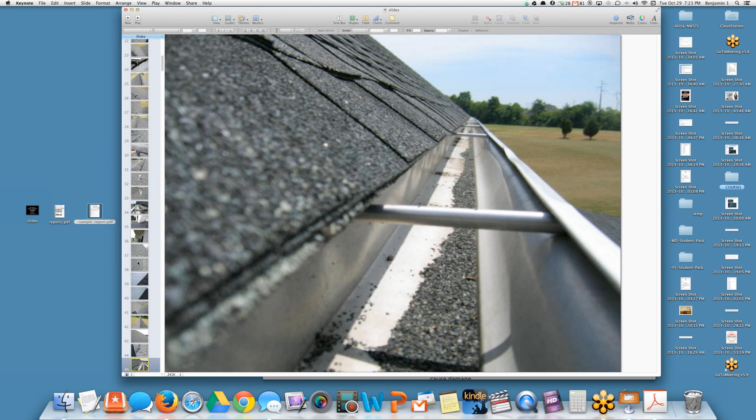Here's a shot of the gutter. Skylights—I'm required to inspect skylights, but I also inspect all the flashing: the header, which I call the apron or footer, and the step flashing. And I look for any kind of damage. The vents, the chimneys, all the planes of the roof, not just the one I can see from the front yard. There's the porch roof.

So I'm going to go a little fast here. I'm inspecting everything—there's a tennis ball in the gutter right there, so that needs to be cleaned up, and that's an improvement recommendation. A homeowner can clean tennis balls. There's the stucco, and now I'm down on the ground. The stucco exterior of the chimney is cracked and damaged, so that needs to be repaired. There's a good shot there.

I'm a true believer that a picture is worth a thousand words. And when you have almost a thousand pictures, that's a lot of words. So let's go through the pictures. I'm inspecting everything, every component, almost every area, and taking pictures like crazy—I'm just shooting like nuts.

Take pictures, take pictures. Don't be afraid that you're going to take a picture of a defect and not see it or not put it in the report. Take a picture of it—you will see it. Believe you'll see the defect you took a picture of, and you will see it. If you're unsure of that, it just takes a couple years of being confident in your abilities to find defects that you've photographed. If you're unsure, take training. We have hundreds, if not thousands, of hours of online training free to our members.

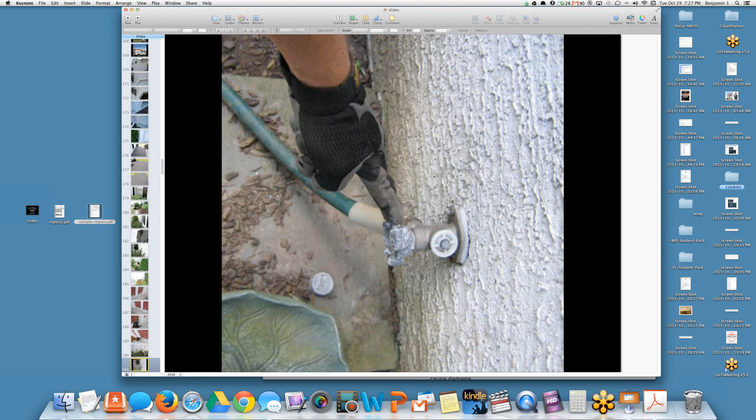Systems and components, think of the exterior system. There's the Goodyear blimp that actually flew above my inspection vehicle. There's the driveway, a component of the exterior. Stucco, obviously, the doors - as you can see, I almost touch everything and take a picture of it. The actual grounding electrode conductor, the grounding wire to the rod, was disconnected.

There's the heat pump, a couple of issues there. I'm not going to dwell too much on the exterior or any other system in the house. So that was the exterior. I'm going to get to the roof only. We don't have all night.

So 226 pictures of the roof and the exterior. How many pictures do you take? I'm going to try to put as many pictures in my great inspection report as I can, because it shows everything that I do. Your report shows everything that you are, what you do, what you see, and what you don't see. It represents everything. A great inspection report represents everything. And if I can throw in more digital pictures in my inspection report than you, I'm going to beat you - it's a competition.

There's the dryer exhaust hood in the garage with a screen. That's not bad enough - it's in the garage and it's filled with lint. So it's the dryer, I couldn't believe it. The dryer is exhausting into the garage and it has a screen on it and it's clogged.

There's the garage pictures, let's skip through that. Not many problems in there. Garage door opener is on an extension cord. It's not permanent.

So I turned on the dryer - I didn't turn on the washer, but you can turn on the dryer to confirm the exhaust. And sure enough, it exhausts right into the garage. There it is, there's the electric dryer. The vent pipe goes up the wall and exhausts out into the garage.

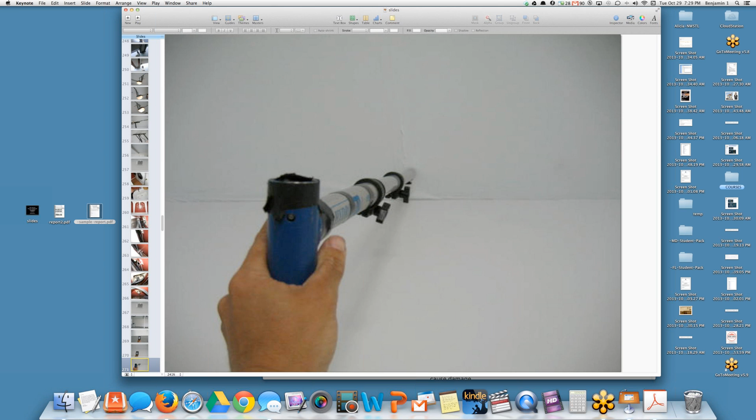And while I was looking at that, I scanned over to the left and I saw a little mark on the wall, and I didn't realize what it was. I got out my tools, took a little picture. There was an anomaly there. I got my moisture meter, my Hydro-Pro moisture detector. It buzzed and ranged - that thing is wet.

So this is the area where that kickout flashing is, observed from the interior ceiling wall intersection area of the garage. On the other side of the garage is the office room. And there's the kickout flashing area at the corner of that office room.

The window was okay, but the wall - I moved the furniture away from the wall, and there was wood destroying organism, mold, there's even a spider, water damage, watermarks. It was very humid there. That wall was actually wet.

And I tell you the truth, the seller didn't even know. The seller really didn't even know what was going on - it was behind furniture. And this is in the crawl space.

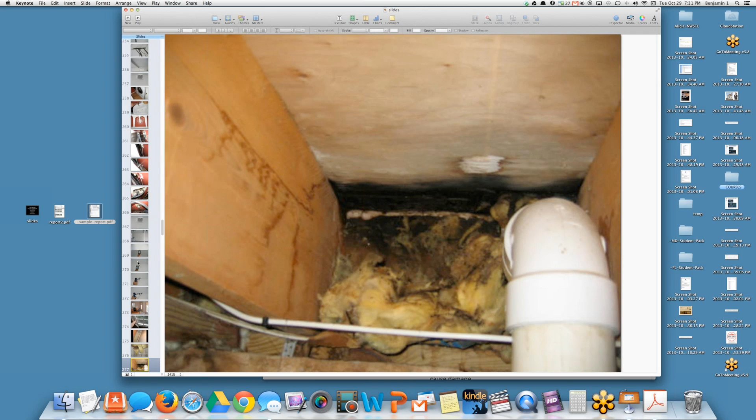This is below the office space. This is the crawl space structure, the floor structure. There's the foundation, PVC drainage pipe. And I pulled down the insulation because I tend to move insulation. And there's watermarks, water damage, major moisture intrusion from that kickout from the roof. So it's coming all the way down through the garage, through the office, down into the crawl space.

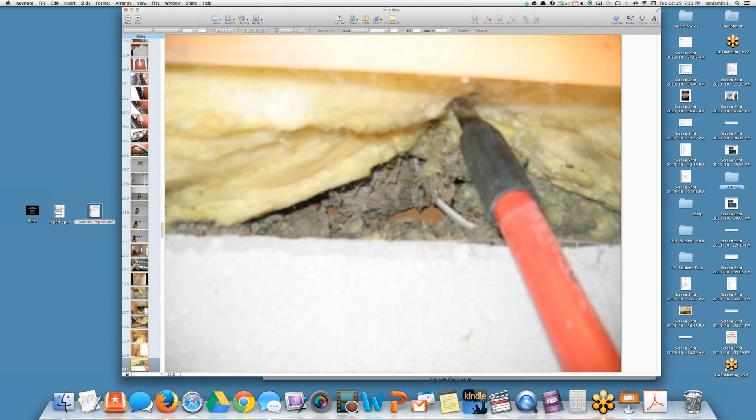So then I started looking all over the place, and the whole place now has watermarks. The other crawl spaces have watermarks.

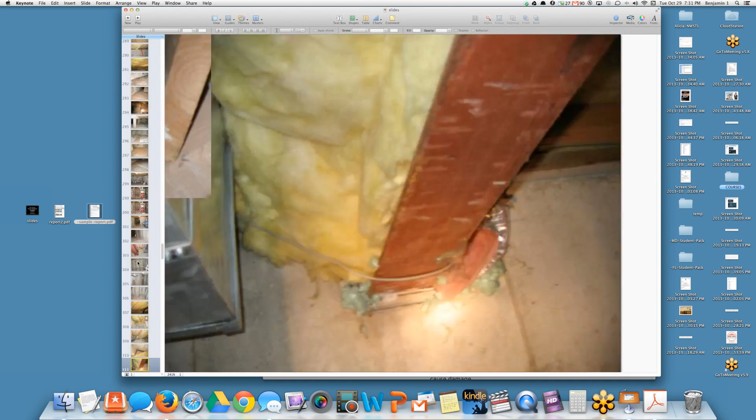There's water coming in, there's been a lot of problems with this home. On the outside, it looks perfect, but some indications with the gutters and downspouts not diverting away. Inspect everything and take a picture of everything because you're going to need them. I'm going to put it in my inspection report because that's how I write great inspection reports, and my clients love those pictures.

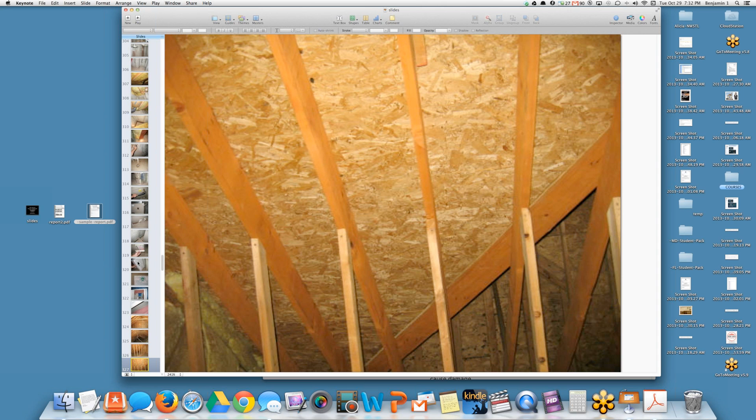So let's go through. As in the standards of practice, under the roof system, you're required to inspect the general roof structure from underneath, in the readily accessible areas like the attic space. So there were no roof leaks that I found here.

Taking pictures of everything. This is the basis for the content within my inspection report, pictures. And I don't have to remember everything.

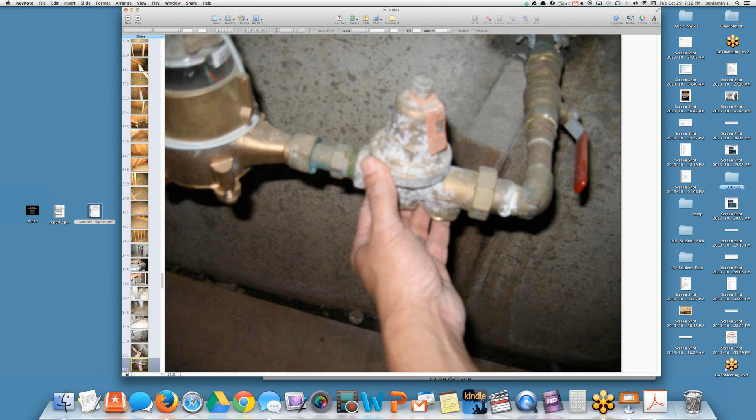So this is the discharge pipe of the hot water tank, main shutoff valve, 200 amp electrical panel, that's in good shape. I'm just going to go through these systems faster. The sump pump pit is sitting in a big pile of dirt, which clogs the pump and makes it fail prematurely. It should be in a nice clean sump pump pit bucket.

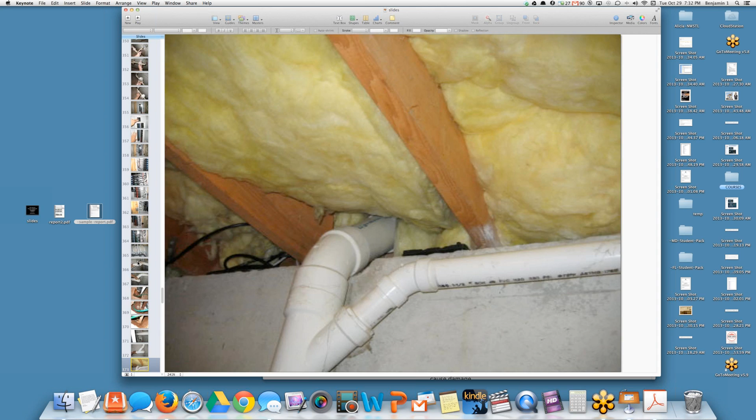Plumbing leaks, some GFCI problems. I ran water at all the fixtures. Hot and cold was reversed.

I'm doing the interior as required by the SOP. The handrails, some drywall cracking. I'm just going really fast here. I understand, we're just going to get to writing this inspection report.

So let's write a home inspection report. Let's just write the roof system. Again, I'm inspecting everything and I'm taking pictures of everything. Now I'm going to use my SOP as a guide.

It guided me through the house, told me what to inspect, in what order, and what not to miss. Now I'm going to use the SOP as a guide to write my inspection report, system by system, component by component. Here's the SOP itself.

The roof, I shall inspect all these other components, describe the roof covering material, and I shall report in need of correction any leaks. I break it down a little bit. My report now has a header and kind of like chapters and subtitles within the chapters.

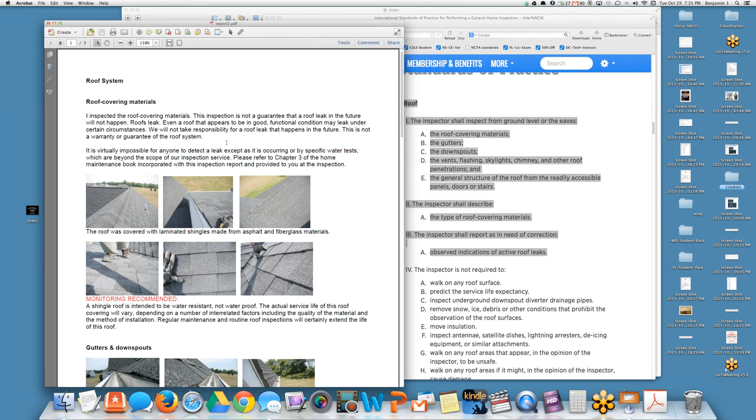So here's the report that I just wrote for this webinar based upon the photographs that we have. Remember the system, and then I break it down to components that are especially required by the SOP. Sometimes I throw in more additional components, especially for heating and cooling systems. So the roof system is a category, like the top header of this section, and then I break it down into components.

And I wanted to go over some of the basic disclaimers and paragraphs that I always have in every inspection report. Not too much, I've got maybe 100 words here. I don't like to say too much within every inspection report, but these kind of things work for me. I want to help my clients focus on what it is that I'm doing and set their expectations.

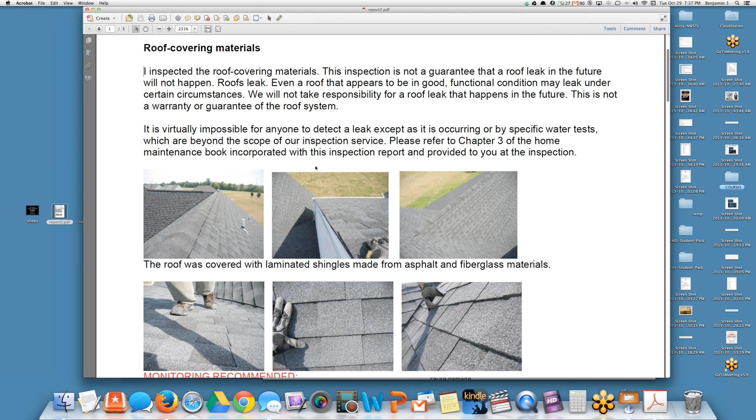So I take all of that general information and divert my client somewhere else to get this general information that I still want to tell them about. And I've incorporated it into this inspection service, and you have agreed to that. But for this inspection report, which is going to represent everything great that I do in my business, I'm going to leave it for only client-specific and house-specific information, and I'm going to blow you away with photographs of the things I do during my inspection.

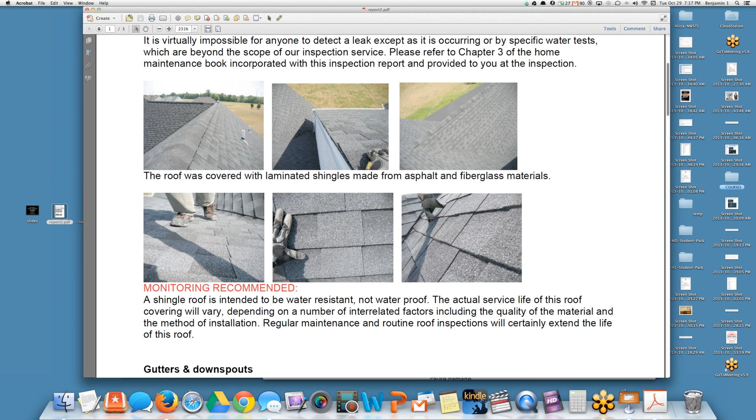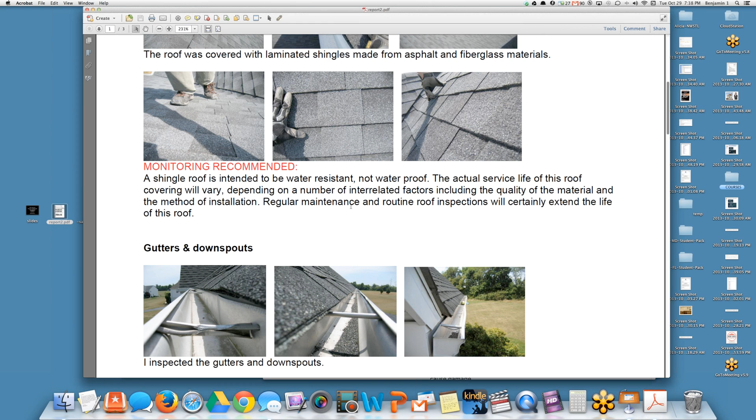The roof was covered with laminated shingles made from asphalt fiberglass materials. That's about all I want to say. Monitoring recommended. A shingle roof is intended to be water resistant, not waterproof. The actual service life of this roof covering will vary depending on a number of interrelated factors. Regular maintenance and roof inspections will certainly extend the life of this roof.

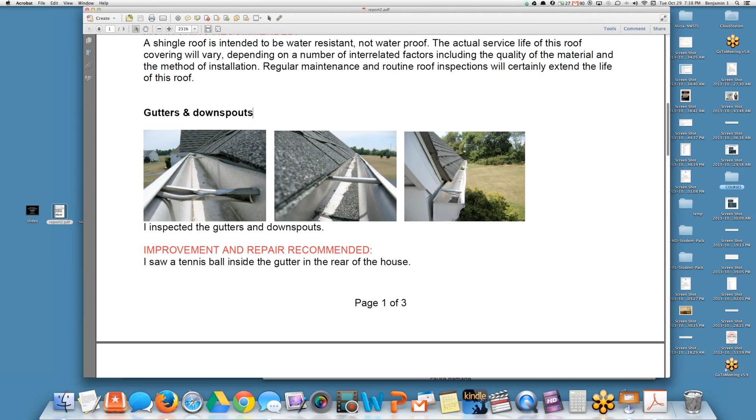And I tell my client at the end of every inspection that I can come back and do home maintenance inspections if you'd like. The components category, gutters and downspouts underneath the roof system. I inspected the gutters and downspouts. Improvement and repair are recommended, something a homeowner could do. I saw a tennis ball inside the gutter at the rear of the house gutter. Improvement and repair. I saw indications of improper installation of the downspouts and diverter pipes, including the sump pump discharge pipe.

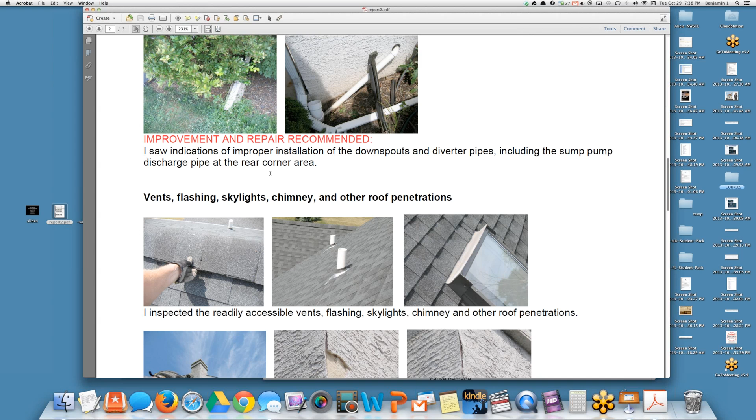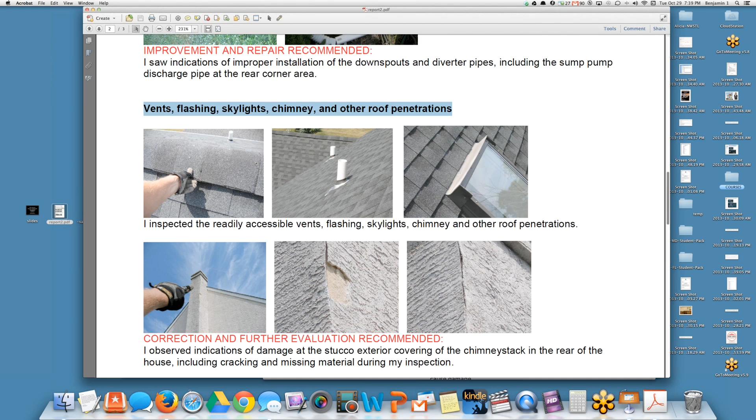Here's another component, vents and chimneys. So I'm using the SOP to guide my inspection as I inspect everything and take pictures of everything. And then I use the SOP to write my report. System, component. Describe the component with pictures and a nice sentence that you inspected it using past tense, and then make recommendations that matter.

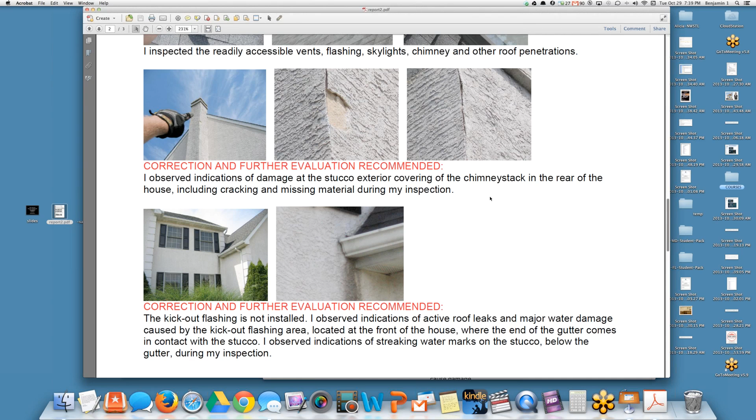I observed indications of damage at the stucco exterior covering of the chimney stack in the rear, including cracking and missing material. Correction and further evaluation recommended.

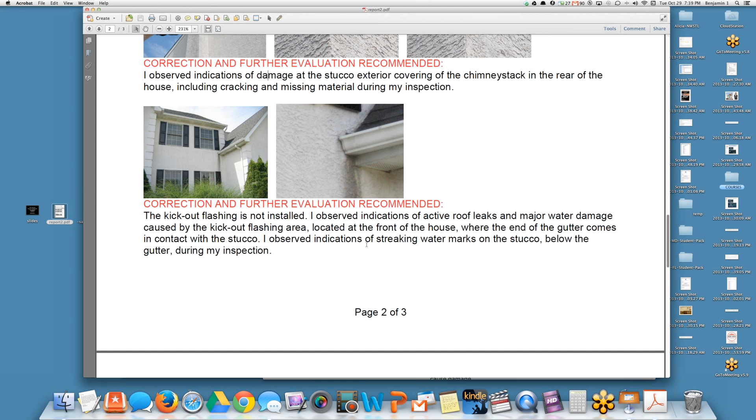A kickout flashing is not installed. I observed indications of active roof leaks and major water damage caused by the kickout flashing area located at the front of the house, yada yada. I observed indications of streaking watermarks on the stucco below the gutter during my inspection. I observed indications of active water intrusion and water damage in the garage ceiling near this kickout area during my inspection.

These sentences are written in a particular way. Great inspection reports have a systematic approach in the communication, right? All the sentences kind of look the same.

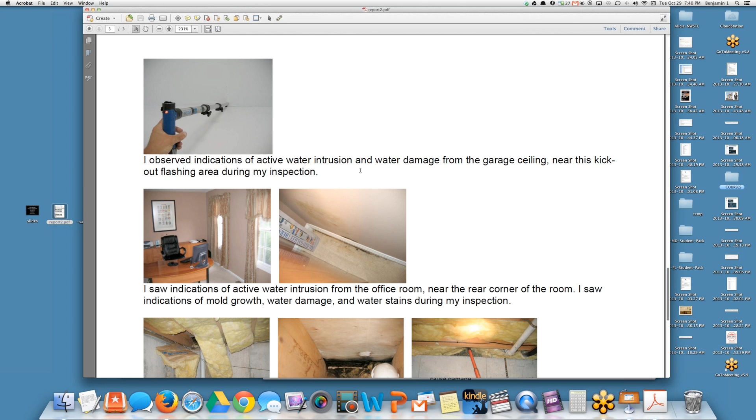And our legal counsel at InterNACHI gave recommendations on how you should say that you saw something, a defect, during the inspection. One way: do not use 'no evidence was observed.' Use this sentence structure: I observed, past tense, the defect during my inspection. That's it. So, I observed indications of active water intrusion during my inspection. It's past tense. I saw indications of active water intrusion during my inspection. I observed indications of water intrusion below the office room. Structural damage caused by water intrusion. This area was wet to my hand.

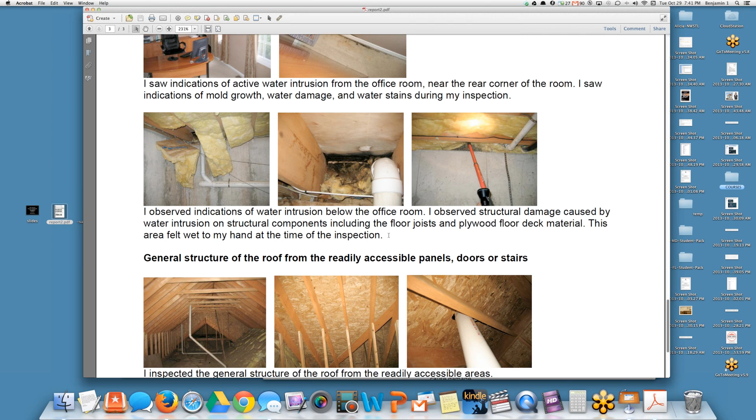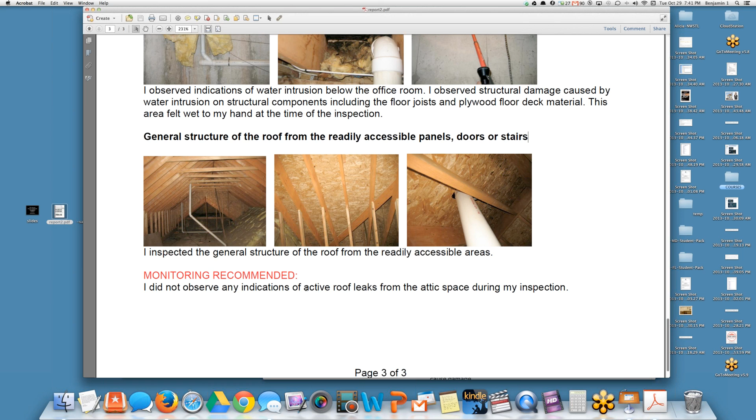So here's another component, the general structure from underneath, right? I inspected the general structure of the roof from readily accessible areas. That's almost a copy paste from the standards of practice. I did not observe any indications of active leaks from the attic space during my inspection.

And the pages of the report, of a great inspection report, should be numbered so that no one page can be extracted without anybody knowing.

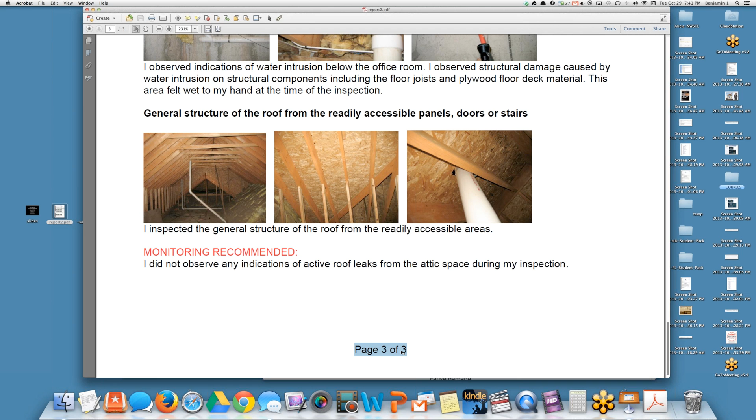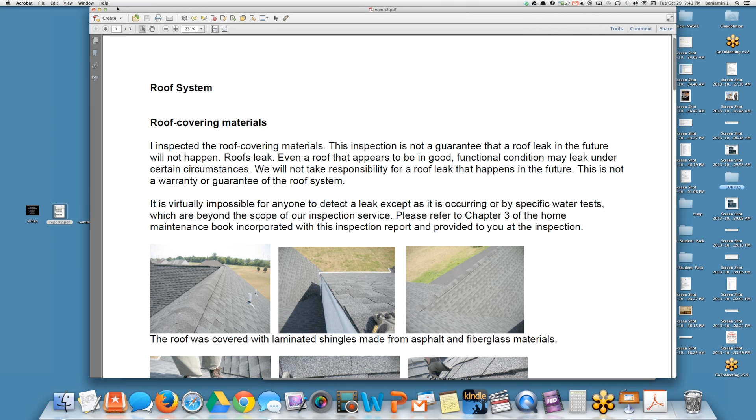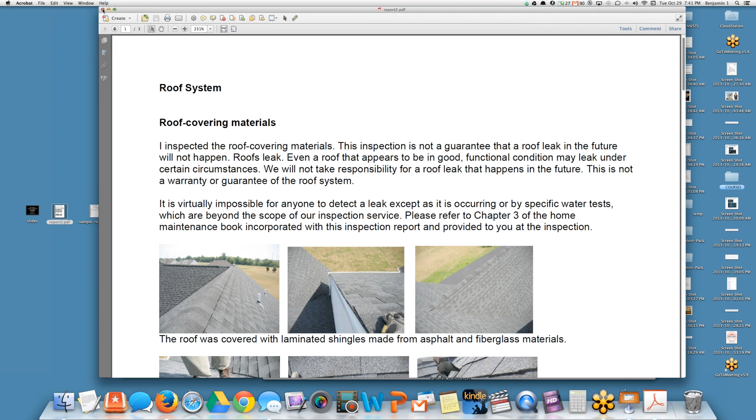So that's it. That's the roof system. It's very specific and concise, specific to the house, and written in a format that is repeatable. You see this type of format: headings, system, component, identifying the component, describing the condition, and making recommendations.